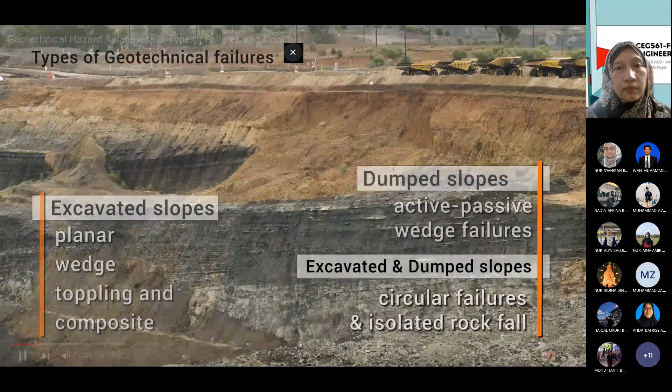The next section will discuss the main types of geotechnical failures that occur in open-cut coal mines. In excavated slopes, these include planar, wedge, toppling and composite failures. In dumped material, these include active-passive wedge failures. Failures that may occur in both excavated and dumped slopes include circular failures and isolated rock fall failures.

Planar failure: these types of failures occur where a block of rock slides along a single defect that dips and daylights in the excavated face. Wedge failure occurs where two continuous planar defects intersect and daylight in the excavated face.

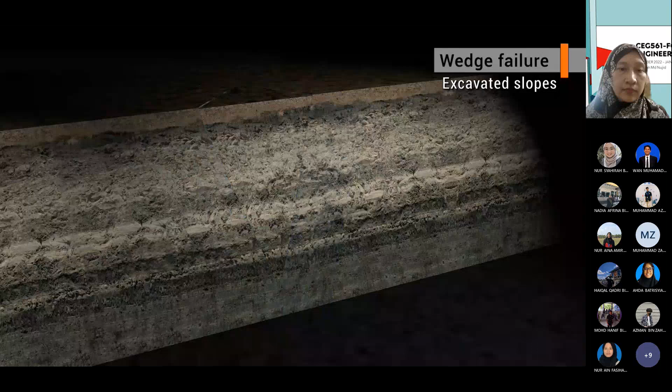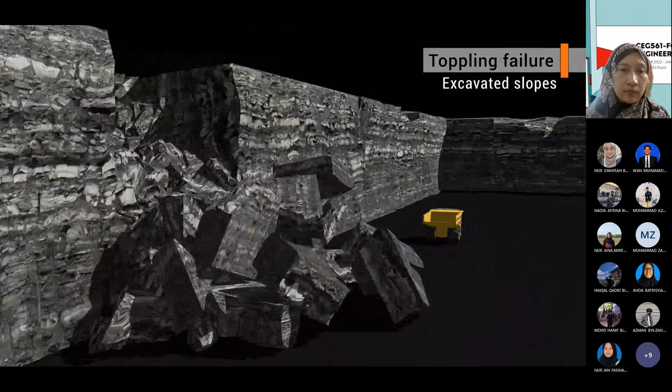Wedge failure occurs where two continuous planar defects intersect and daylight in the excavated face. Toppling failure occurs when persistent defects dip steeply into the excavated slope and the blocks or columns formed topple out of the face. These failures generally have a weak layer at the base that the vertical blocks slide along.

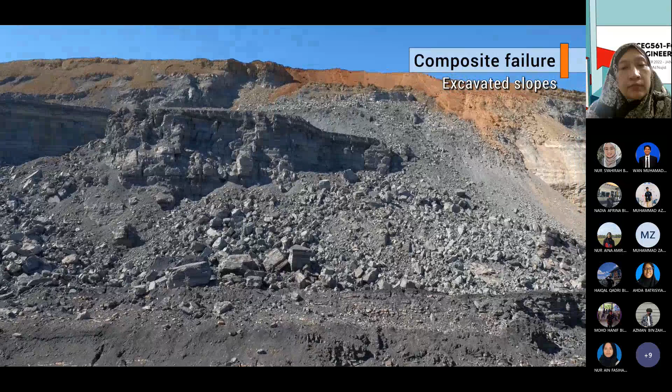Composite failures are typically the most common type of failure in excavated coal mine slopes. They involve a combination of planar, wedge and toppling failure modes along persistent defects, and also some component of rock mass fracturing and failure. Typical composite failures are vertically to subvertically bound by structural defects and horizontally bound by a weak, generally carbonaceous layer. Such failures occur at both the individual bench scale or as a failure of the overall pit slope.

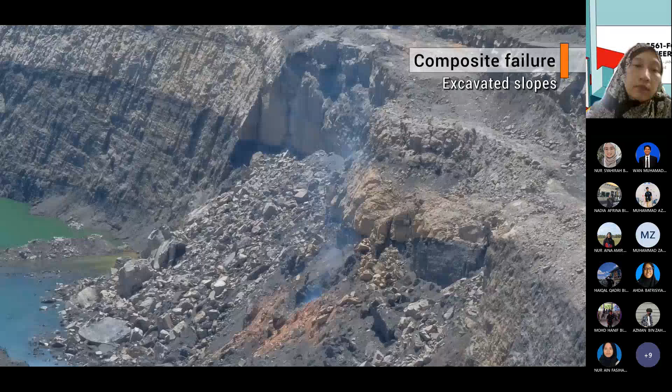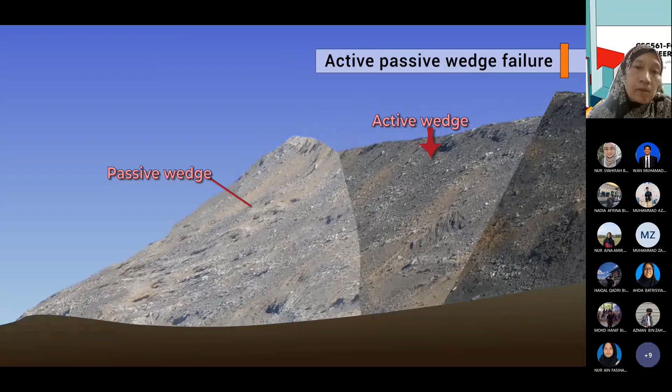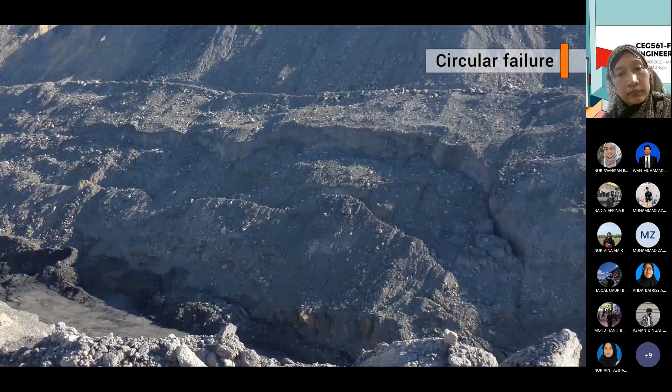Active-passive wedge failures occur in dumped slopes, particularly where the dump is formed on a weak and/or steeply dipping floor. Circular failures occur in highly weathered, soil-like or dumped material that contains little to no large rock fragments. Circular failures may be deep-seated or may occur near the surface where they are referred to as skin slippage failures. Circular failures typically result from an excavated or dumped slope that is greater than the angle of repose through undercutting or over-steepening mining practices.

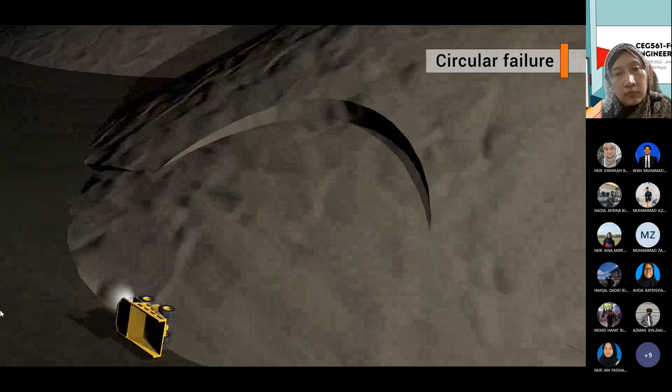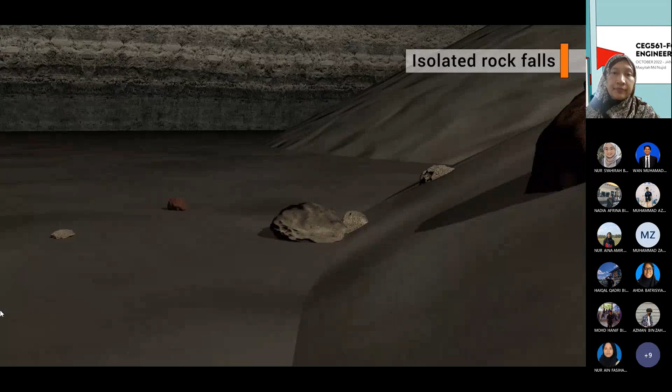Isolated rock falls are failures in which individual rocks fall out of a dumped or excavated slope face. These can be just as hazardous as failures involving a whole slope face. They generally occur after heavy rain events, where poor separation of dumped material has occurred, or where blasting has been poorly executed and the face not adequately scaled for loose rocks at the time of mining.

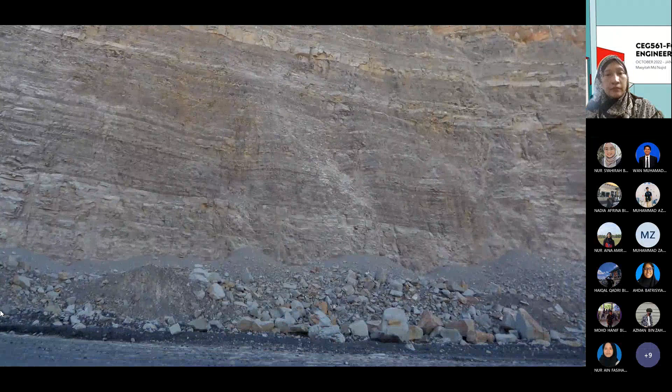Once a geotechnical hazard has been identified, an inspection will be completed as per site requirements. Controls will then be put in place to effectively manage the hazard, and must be followed at all times. If you observe conditions change from those documented in the site hazard report, notify your supervisor immediately.

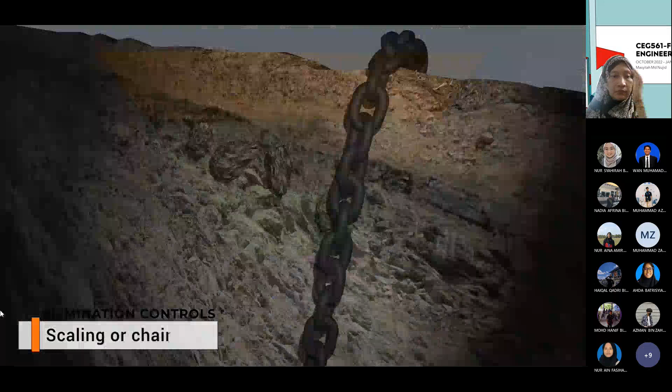Typical controls to manage geotechnical hazards using the hierarchy system include elimination controls: scaling or chaining of slope faces and crests to remove loose rocks, and trim blasting to remove unstable ground.

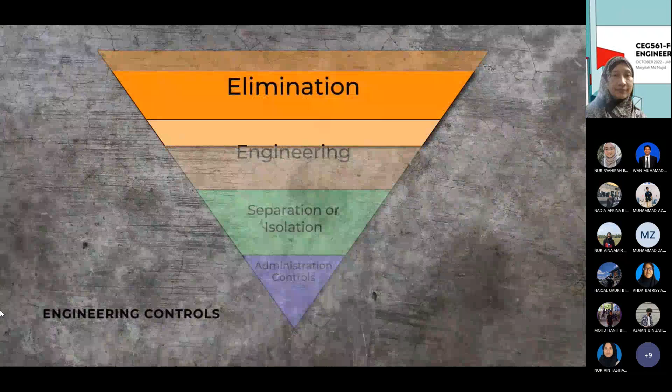Redesign or engineering controls: altering the blast design, such as changing from a hard wall to a soft wall, installing temporary buttresses, reviewing and redesigning the mine plan such as incorporating additional benches into both excavated and dumped slopes, and only allowing equipment with falling object protection installed to work within the hazard zone.

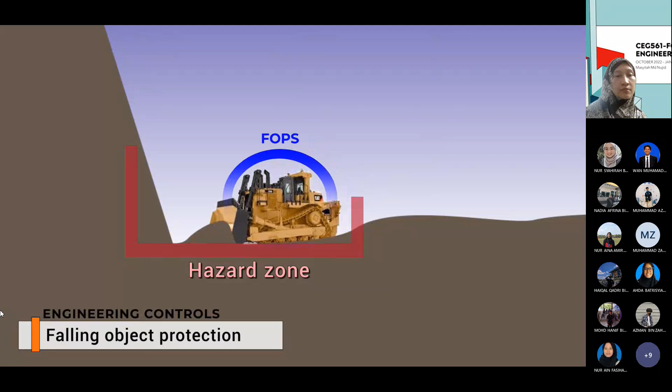Separation or isolation controls: controlling access at the crest or toe of the identified hazard by installing hard barriers, and restricting to single lane access past the hazard.

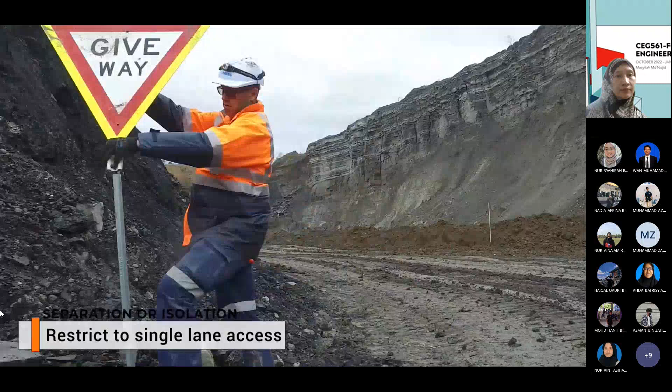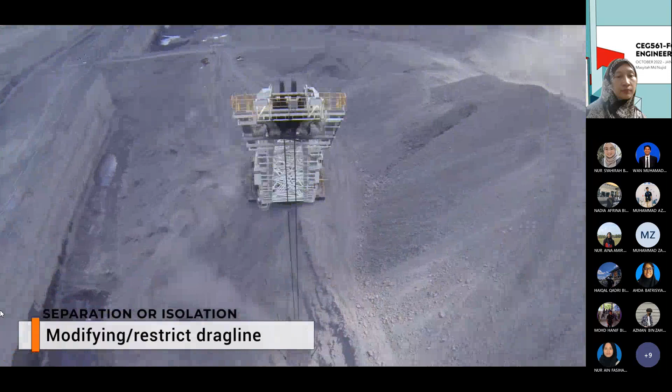Limiting equipment used in the hazard zone, such as allowing the excavator arm and bucket only inside the hazard zone, or modifying or restricting the dragline dig sequence to minimize exposure to the hazard. Regrading or re-establishing tip heads, and rectifying drainage conditions including installing pumps and grading slopes away from the crest into a sump.

Administration controls: increasing the frequency of inspections, allowing only experienced operators within the hazard zone, and completing additional risk assessments for specific mining sequences, such as mining on retreat or backfilling after mining coal. Establishing monitoring controls, such as peg telltales, wireline extensometers, prisms, LiDAR, or slope monitoring radars.

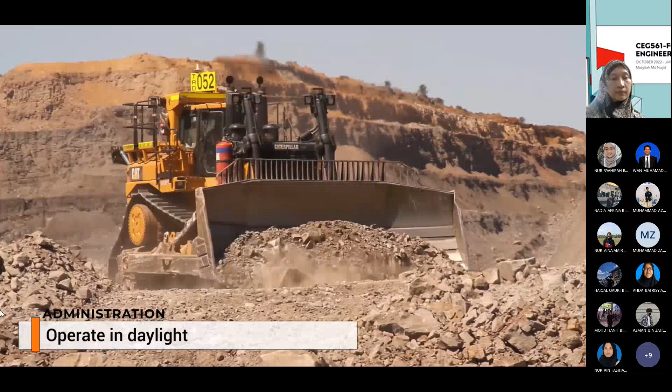Restricting operations to daylight hours only, or installing additional lighting. The number and nature of controls is governed by the consequence and likelihood of a slope failure occurring. Slope monitoring and implementation of standoff zones are two of the most commonly applied and effective controls if managed correctly.

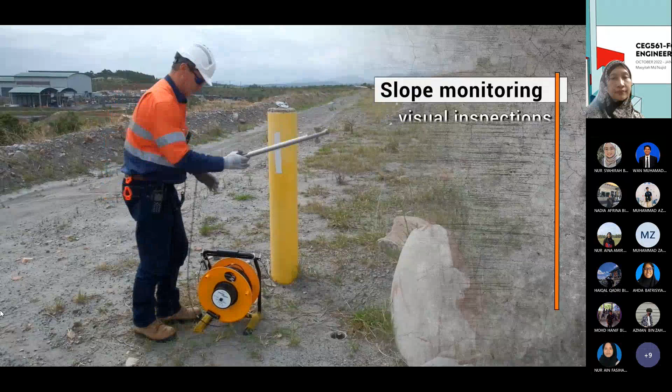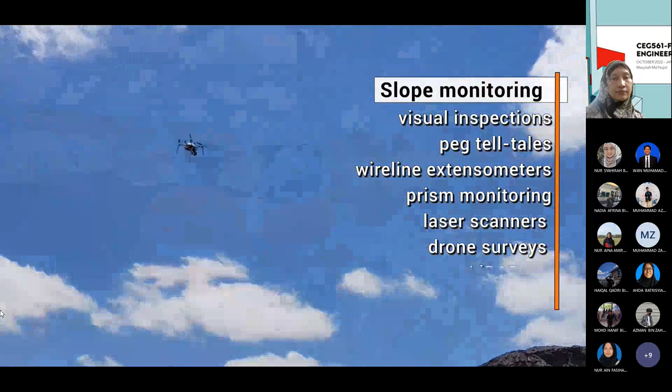Slope monitoring is completed by one or more of the following methods: visual inspections, peg telltales, wireline extensometers, prism monitoring, laser scanners, drone surveys, LiDAR, or slope monitoring radars. Monitoring devices can be used for either long-term, broad-scale detection of slope movement, or targeted monitoring of a specific area of concern. Regardless of the monitoring device implemented, it's important to remember the following.

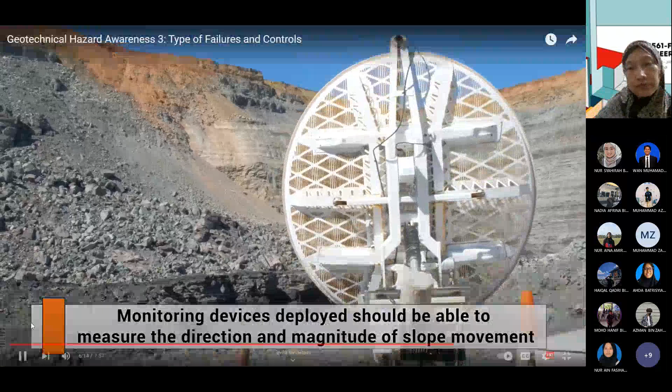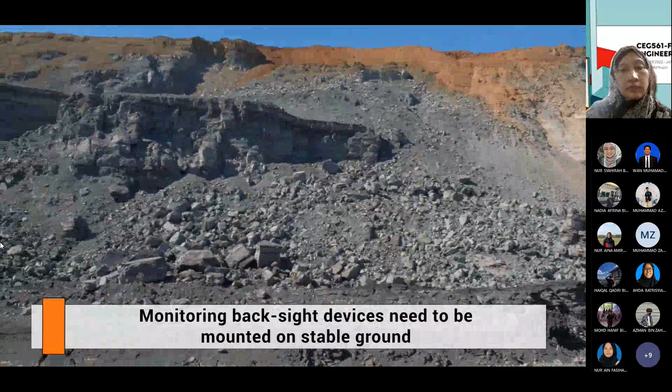Monitoring devices deployed should be able to measure the direction and magnitude of slope movement. Monitoring back-sight devices need to be mounted on stable ground, otherwise false or misleading measurements can be recorded. Monitoring equipment needs to be regularly inspected and serviced to ensure it is operating as required. Trigger or alarm levels need to be predefined and should be set at levels specific to site conditions.

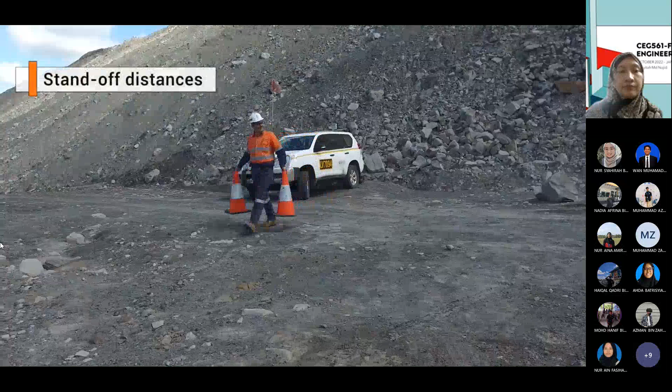Standoff distances can be applied at both the crests and toes of excavated or dumped slopes. Standoff zones are typically based on empirical charts, past performance of slopes with similar conditions, or modelling results from software simulating individual rockfalls or slope failures. The applied standoff distance should be appropriate for the type, size, likelihood and consequence of slope failure.

Many sites have standard restriction zones that are applicable at all times. Increases or decreases to these standard restriction zones are then made on a case-by-case basis depending on the specific hazards present.

I think you have seen and watched the geotechnical hazards. So what we can say is that the video shows us the causes of slope failure, and then how we can mitigate by controlling some techniques, adopting some monitoring, adapting by having advanced technology to control and monitor the slope failure.

It says that by integrating technology into our decision making, administrative work, and also the monitoring process, it can prevent future failure. So the purpose we can see from this learning outcome is to understand the causes and what theories are involved in the analysis and design, and how you mitigate to prevent future failure, and do some forensic engineering steps, solutions, and then propose guidelines from the public authorities, from any departments that deal with the project site failure.

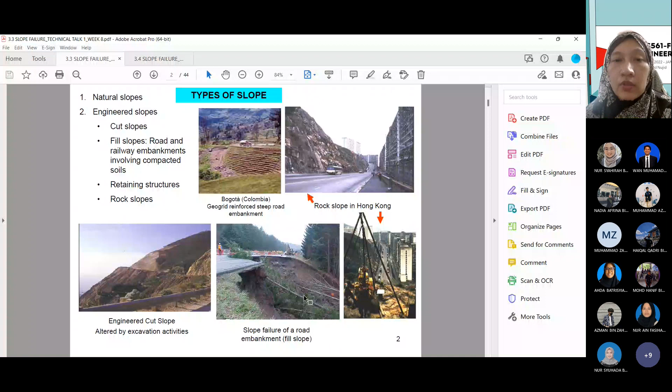So not to forget, natural slope failure can also occur. It's not only excavation activity that causes slope failure; it can also happen in natural slopes. So what are the reasons?

For example, if you take a case close to Malaysia, the Yan recreational area, and most likely happening in Baling. The natural slope failure is triggered by heavy rainfall. But when we did some forensic activities, we found evidence showing human activities on top of the hill, on top of the slope.

So we want to investigate the factors that bring about the landslide or incoming slope failure. If you do not have slope failure that brings water, it's just soil mass that may not be as harmful compared to slope failure coming with a landslide.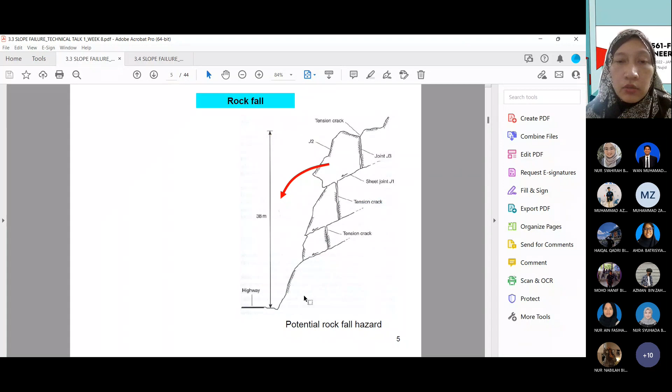And then on rock failure, for example in Bukit Lanjan, Malaysia, we also have rockfall. The rockfall can cause pavement damage. When this happened, for example in Bukit Lanjan in 2003, there were massive blocks.

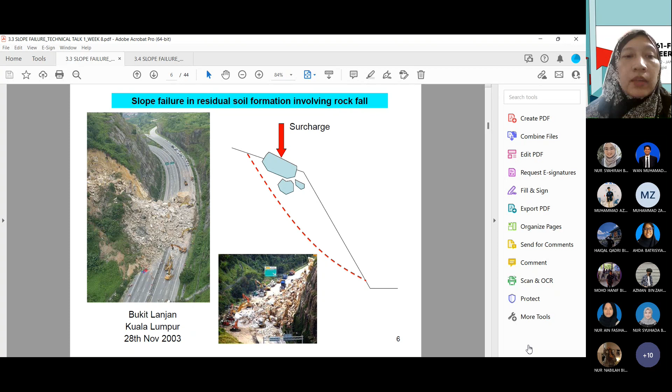By definition, I think everyone understands when talking about the features of slope failure, some terminology, and how the process begins, starting from weathering itself, from the intact parent rock becoming weathered from class 1 through the classic weathering grades, making the rock into soil form with lesser strength. When you go into detail, for example, you construct a structure on top of the slope or hill, it gives additional load.

So the additional load can bring the slope to a safe or unsafe condition. How do we justify whether the slope is safe or unsafe? We have to do some sort of analysis.

On slope materials, we have so many deposits such as alluvial, glacial, aeolian, residual. All these deposits are defined by weathering processes - for example, residual deposits are formed in place by mechanical and chemical weathering of their parental bedrocks.

In forensic investigation, it's not only looking at the geotechnical aspect - your site is near the geology origin, the geology background. So you need to find out what is the parental rock in the site area. Once you've identified this parental rock, you can support your final decision on whether the structure is stable to be built on that kind of parental rock.

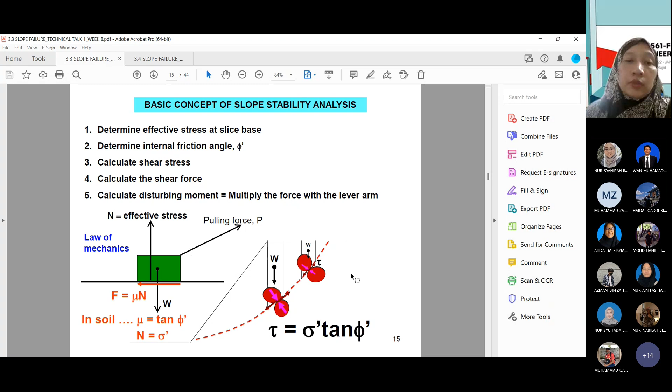Remember, by adopting any method of slices, we are dividing our soil mass into few vertical slices, and then starting to calculate and determine the factor of safety, identifying what are the disturbing forces or stresses, and what are the resisting forces and resisting stress. So when you have FOS greater than 1, we can say the slope is stable. The same thing is adopted in slope stability using the effective stress concept.

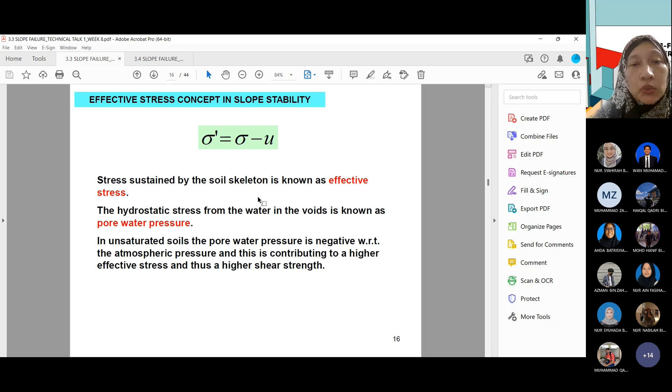Effective stress concept means you have effective stress equal to total stress minus the pore water pressure, U here indicating pore water pressure. However, most likely the slope failure may occur due to unsaturated conditions. What is the unsaturated condition? It's a condition where the slope mass may fail in regions where the upper part is unsaturated in dry conditions, and the below part is in saturated conditions. So using the simple effective stress analysis or concept might not be enough to get the correct answer if you are analyzing manually.

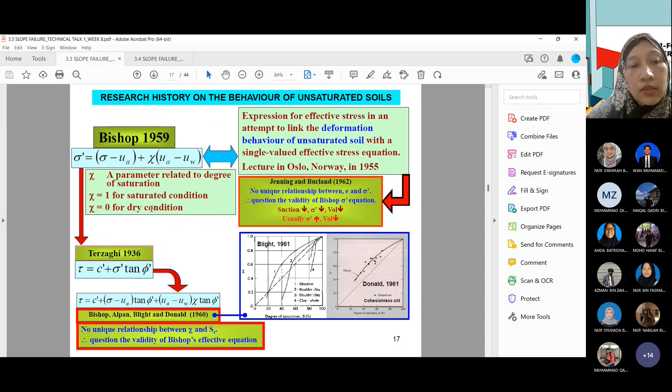The old theory, the old concept, might not be relevant or give the right solution nowadays. So other theoretical researchers such as Bishop and then Fredlund introduced the concept of unsaturated soil. Why is this concept or theory of unsaturated soils important? Because they found out that slope failure is not due to effective stresses subjected to water pressure only - it can also happen due to air pore pressure. That's why the Mohr-Coulomb formula or theory has been extended by including the suction effect for unsaturated soil.

Right now, just now we only have effective C plus sigma effective tangent effective phi. Now the formula is extended by including the effect of air pore pressure minus the pore water pressure, so the failure surface will be changed. If you remember from advanced geotechnical engineering, we have seen the critical stress path and the failure envelope represented in Q-P space. When you plot the Mohr-Coulomb failure envelope compared to the advanced theoretical formula, that will be totally different in terms of the failure envelope. The failure envelope for the advanced theory can show uncertainty that could not be predicted using the Mohr-Coulomb theory.

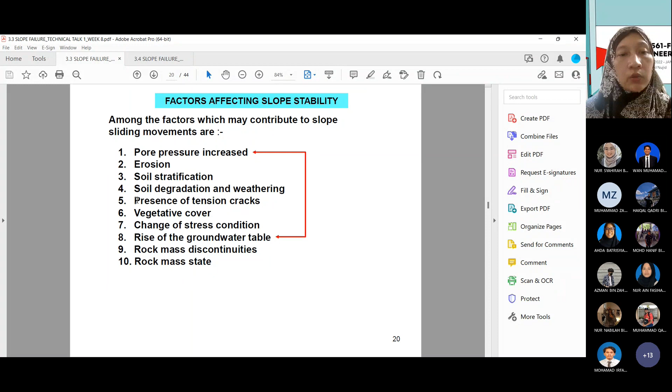You just take it generally. How do you know or how do you identify the causes of the failure itself?

What are the important items that need to be carried out when you try to evaluate the stability of the slope? The first important item, as I said, is the shear strength of soil.

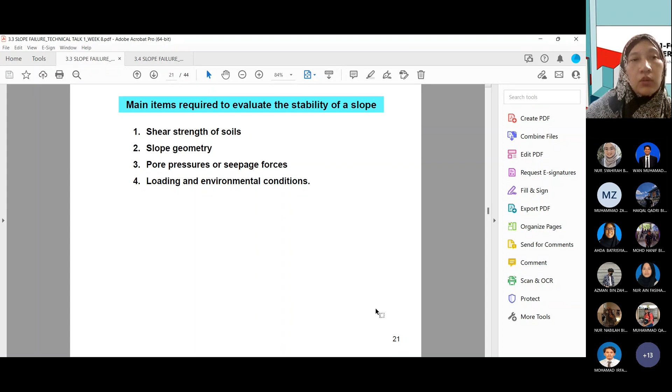Back to the suction, one of the causes is the pore pressure effect. As I said, pore pressure doesn't come only from water, it can also come from air. The unsaturated theoretical concept adopts the suction theory. Suction is the difference between the air pressure and the water pressure. In the field, air pressure is 0 atmospheric, which is 0 kPa, and the pore water pressure is negative. Cavitation occurs at negative 101.3 kPa, or 1 atmosphere.

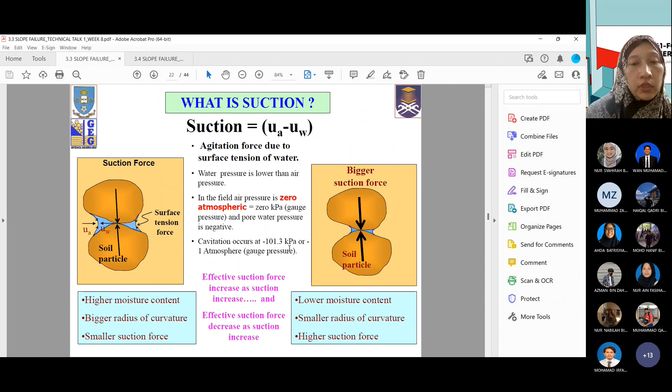If you look at this concept, it says that slope failure may introduce two different zones: the first is unsaturated, and at the bottom is the saturated zone. So we can no longer simply use the Mohr-Coulomb theory. This particular problem, especially in slope stability applications, the theory behind the failure must be adopted using advanced techniques such as unsaturated conditions. The unsaturated condition increases the shear strength and produces a higher factor of safety (FOS). This is the benefit of including the suction effect in your theoretical concept.

I will not explain this in detail because we are not covering unsaturated soil, but it's good to have an overview. Just remember the conditions of the unsaturated zone, and the effect of pore water pressure and pore air pressure on the soil mass above the slip circle, and the conditions splitting between the unsaturated zone and the saturated zone.

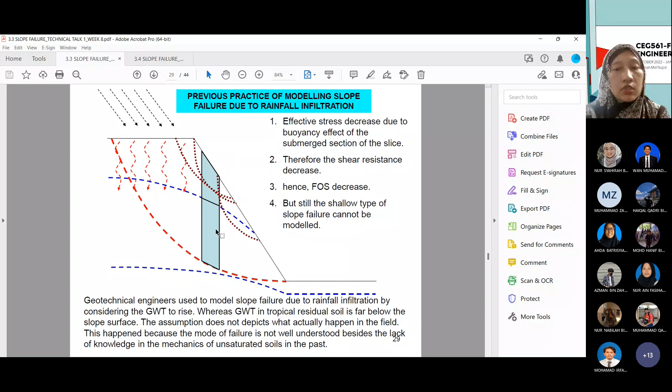The factor of safety concept can be analyzed. Just now we focused on the concept and design, adopting the proper theoretical formula. The analysis can also be calculated using limit equilibrium analysis, and also using the finite element method for factor of safety. The FOS is derived from the summation of forces in two directions and moments about a common point. The stability calculation is performed by dividing the soil mass above the slip surface into vertical slices, if adopting limit equilibrium analysis such as the method of slices, Bishop, and Fellenius.

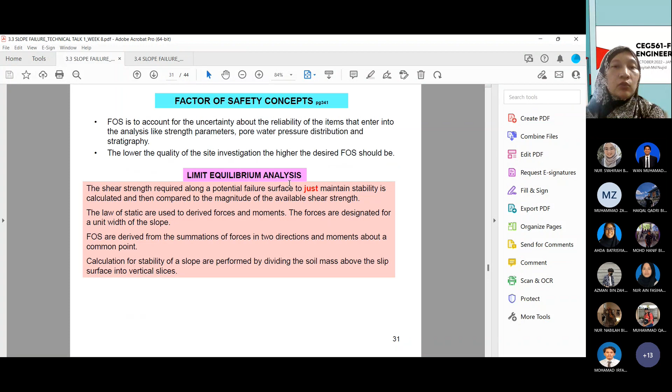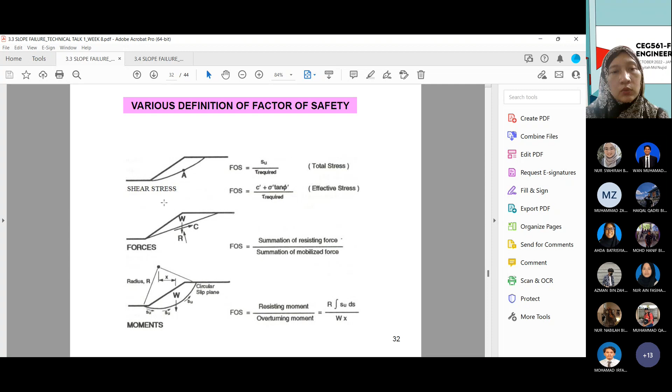Okay, that's what we want to explain. If you remember what you had done in the past using the manual calculation to calculate FOS, that's what we call the limit equilibrium method. Understanding the ratio between the SU and also the shear stress required tells you the value of FOS.

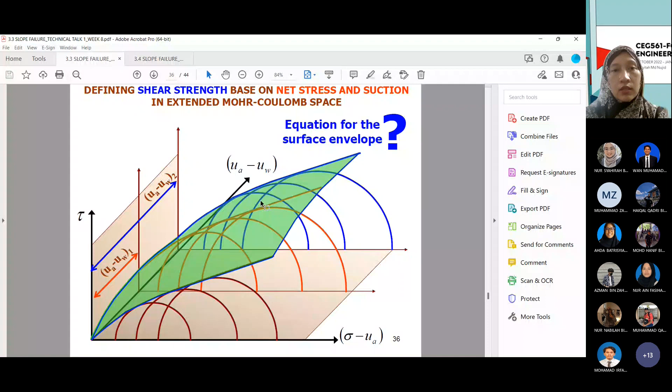Okay, the shear strength model. This is, as I said, the advanced shear strength formula and theory to calculate the FOS in slope stability. So look at the failure surface. The failure surface is not anymore a straight line, but as assumed by the Mohr-Coulomb model. Right now you might see the circular envelope curve representing the conditions for suction.

Remember, I'm not sure if you're taking advanced geotechnical engineering, but one of the soil models is Mohr-Coulomb. The simplest model for understanding the behavior of the material, either structure or soil, is using the Mohr-Coulomb formula. The good thing about Mohr-Coulomb is it only needs about 5 parameters, the strength parameters and also the stiffness parameters, in total 5.

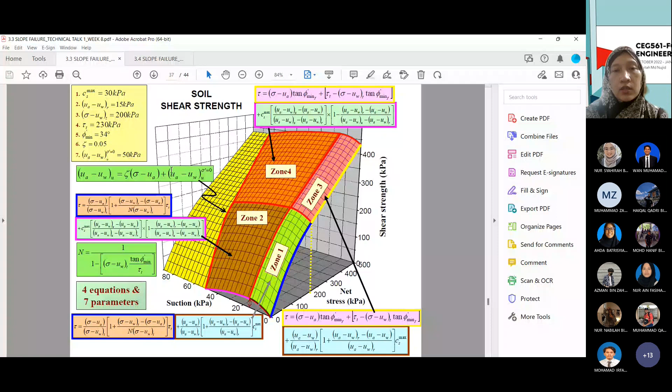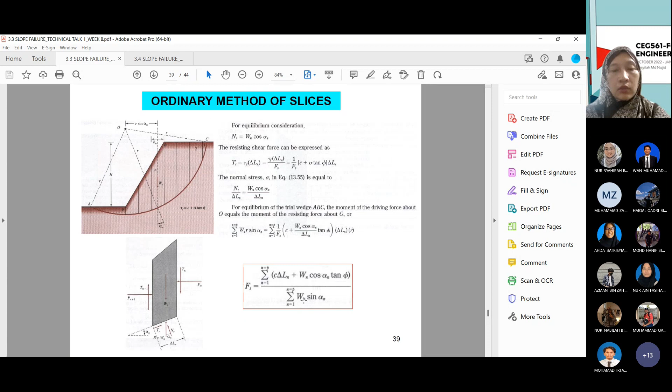So we need to determine one by one all those values from this failure envelope, the circle of the failure envelope of the soil. Okay, this is another concept to calculate the FOS using the limit equilibrium method. I hope everyone remembers we divide the soil mass into a few vertical slices, and then we define and determine the disturbing moment and also the resisting moment to get the FOS.

Okay, generally what we understand is the FOS decreases when the water table rises. That's the thing we usually see. Even now, we can see that the public authority has already installed one monitoring system.

Monitoring gauge to predict the failure of the soil, integrating with the internet, or we call it IoT. This monitoring gauge will tell the authorities about the soil movement. Is the soil movement in the range of stable, or the soil movement in the range of unstable? So it's a mitigation and controlling technique to predict before having a massive failure.

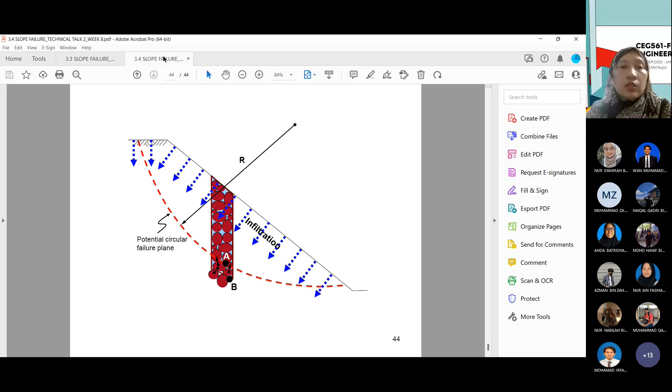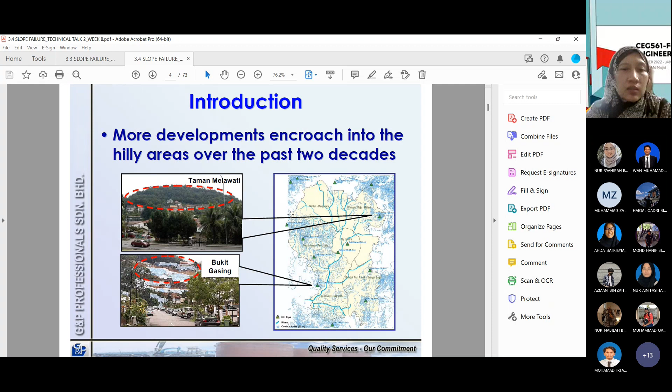Okay, the next one, we go to other notes slides given by a practitioner engineer. It starts with the landslide causes. I think it's the same thing we had seen just now. One of the cases here, very common and very famous, was Bukit Antarabangsa. I think some of you had already taken this case and investigated the structural aspect of failure.

But now you have to see it from the geotechnical aspect of failure. I mean, is there any pore water pressure existing at the failure zone? And then what were the slope failure causes and the slope failure mode? These are the pieces of information that can be highlighted in your report.

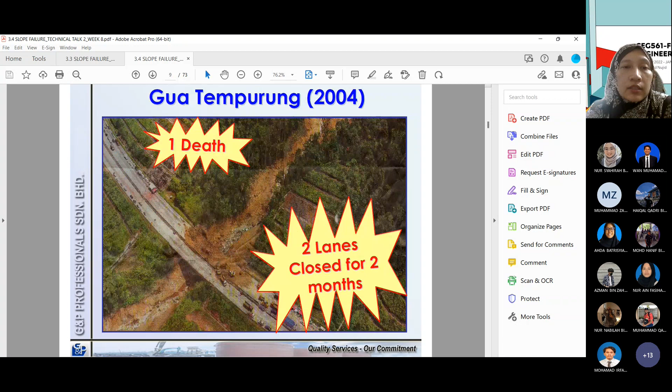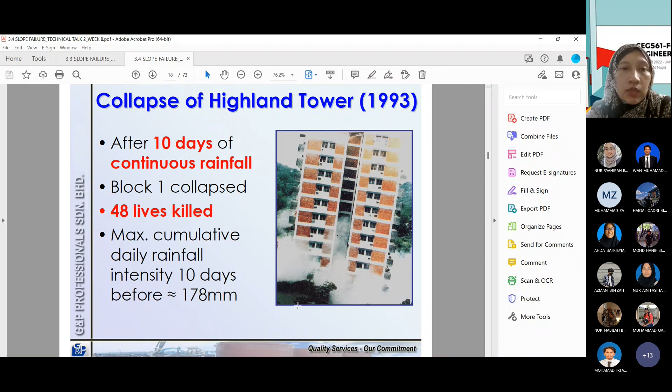Okay, similarly for Bukit Lanjan, Ulu Kelang. Again, this one is very general information on the case description, and how the slope failure or landslide may occur. So the same concept, having friction and then the sliding effect, telling you the resisting and disturbing forces.

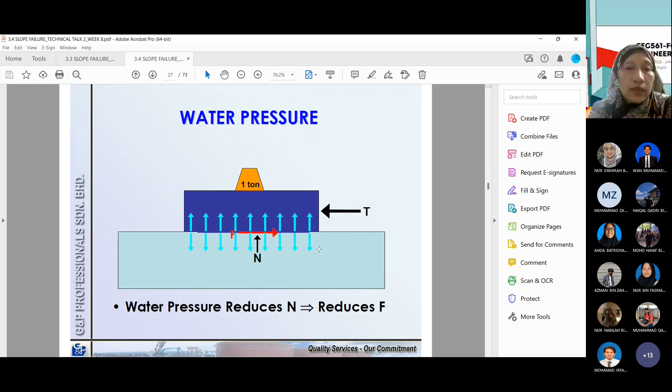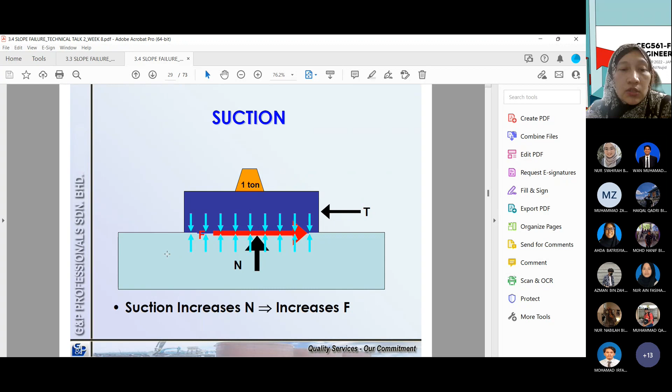One force tries to disturb, the other force in a different direction tries to resist it from failing. Then there's the effect of water pressure. How does water pressure reduce the value of FOS, and the suction effect? You can see the suction effect here by replicating the friction concept, and similarly showing how the suction increases in N forces will increase the value of force F.

And why does the landslide occur? From this table, given in 2006 by two practitioner engineers, it's stated that out of the 49 cases, 29 or 60% were

contributed due to design errors. So what are the common design errors that can happen here for landslides?

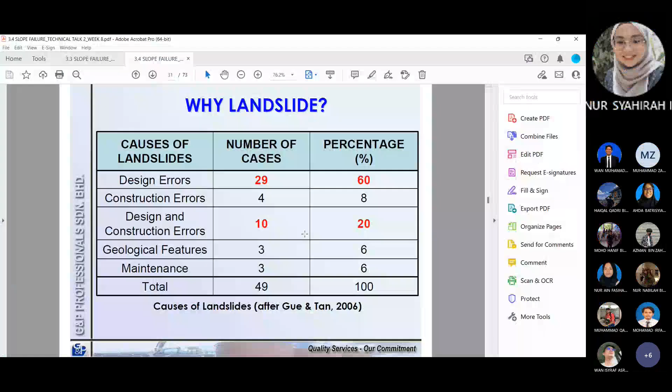Okay, back to our slide just now. This slide is very important because we can see from the different perspective of the practitioner engineers. For the first slide just now, you saw from the perspective of the academician. That's why you can see the detailed formulations in terms of the strengths and also how the unsaturated concept is adopted in the slope stability analysis. You can see that there are very tedious processes to identify the equations and then the parameters to produce the right failure envelope.

So from the academician point of view, now we look at it from the engineer's perspective. Similarly, when you go through row by row, design and construction errors only contributed 20%. The rest are from maintenance, geological features, and construction errors. Construction errors can be due to the site supervisor not monitoring work properly, and geological features, for example, the presence of a weakness plane not being counted in your analysis, and the discontinuity of the rocks. So these are the errors that are triggering landslides.

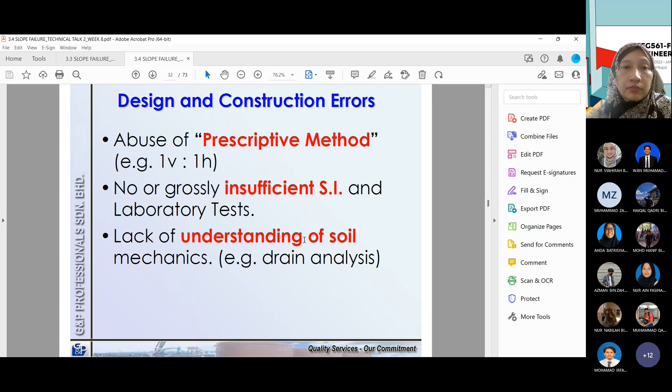Another factor is the slope geometry design. If you look here, let's say you are trying to have a cut slope, and you propose a slope geometry of 1-to-1, one vertical to one horizontal, then you get the angle. So the angle here, for example, is 60.75 degrees with a height of 16 meters. Do you think the slope is stable with an angle of 60.75?

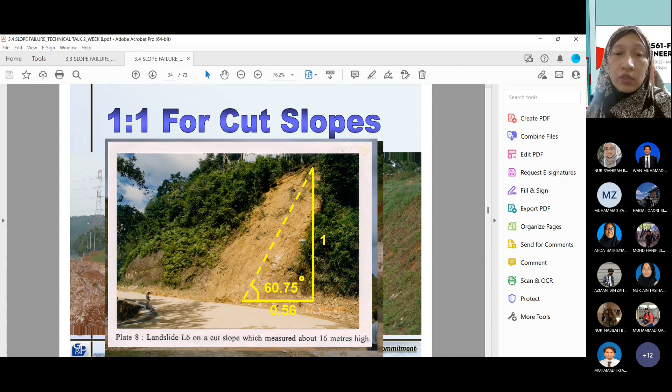Vertical is 1, or 16 meters high. If you were the engineer on site, do you think that this slope geometry design is safe, or is it something that can affect the slope stability?

Another thing is when you have certain soil properties, if you compare slope 1 and slope 2 with different geometries - for example, the height of the slope is 6, similar to slope number 2, but the horizontal distance from the crest of the slope to the toe of the slope is 13.2, whereas for slope 1 it is only 7.5. I mean the horizontal distance from the crest to the toe of the slope is 7.5.

We can see how soil properties and slope geometry design affect your factor of safety value. This indicates that slope number 2 is unstable due to the soil properties itself and also due to the slope geometry. The selection of the slope geometry is not right. So the slope geometry can be changed to 1 vertical to 2.2 horizontal - this is the best slope dimension for the number 2 case slope.

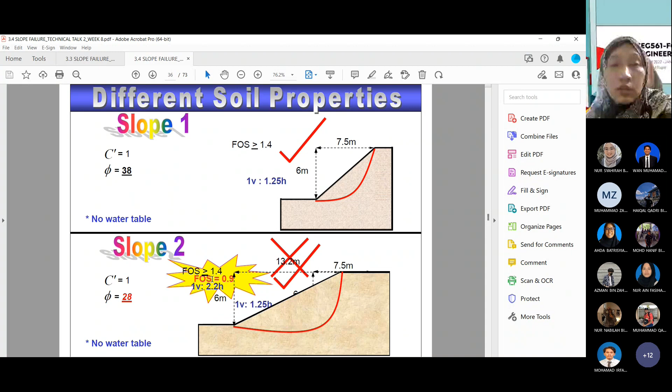For slope number 1 and slope number 2, the effect of the water table is neglected - so we did not include the effect of water. How about if you are dealing with a slope that has the effect of a water table? Of course, you are adding more additional pressure to the soil mass.

Not to forget, when we are correcting slope failure or proposing a slope analysis, there are some guidelines or reference factor of safety values that can be used as indications. For example, if you adopt a manual from an office such as the Government of Hong Kong, it shows how a slope can be categorized into negligible risk, low risk, and high risk, according to the factor of safety value, and also according to the effect of economic loss and loss of life for a 10-year return period rainfall. So when you analyze it, you are also considering the effect of rainfall for the next few years ahead.

This is very crucial because we are dealing with unsaturated conditions, and we play around with hydraulic concepts - the Darcy law, the intensity of water - and how you make predictions on the hydrology in terms of rainfall for a particular period of years.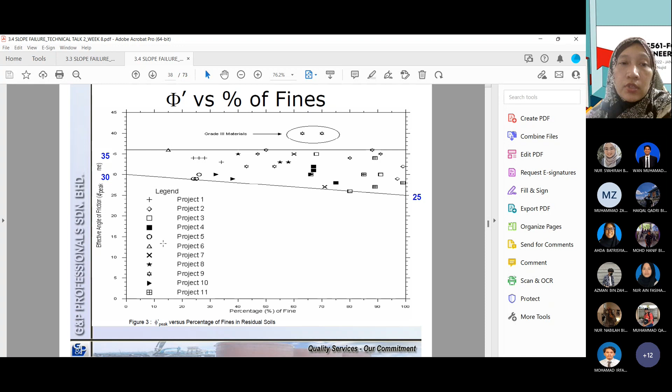If you look at the soil strength used for calculating stress or the FOS, you can see how the effective friction angle relates to the fineness of the materials, and how this friction angle gives the value of FOS. The left and right slopes each have similar effective friction angle and effective cohesion - 1 kPa and 33 degrees. Slope left and slope right have similar values.

You'll notice these two slopes differ in factor of safety - for what reason? Can you see what causes the FOS value on the left and right to differ?

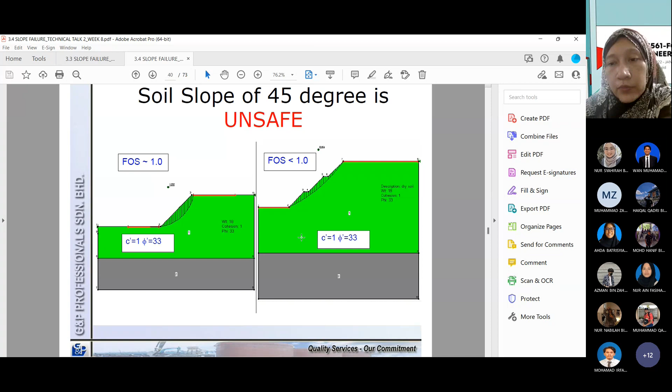And also on the right slope, having the same soil properties, dry condition, weight of soil is 18, cohesion 1, phi 33. But now you can see that there are many berms involved, for example slope face 1, 2 and 3. So there are 3 slope faces, meaning there are 3 berms. So we can conclude that as we have so many berms, it will decrease the factor of safety value. So it's not good to have so many berms, it will produce low FOS.

Okay, the other thing we want to see is the effect of the slope itself. If you look here, the slope geometry is 45 degrees. But now, on the same slope design, we have different berm dimensions and different geometry of the berm itself. So we can conclude that having so many berms will reduce your FOS value.

So you can analyze FOS for slope stability using the limit equilibrium method in SLOPE/W, or you can analyze slope stability the fast way using the finite element method in Plaxis.

So I am offering you this, because you are trying to produce a report, right? A report that you chose, for example, I looked at the list of projects, some are at the college, some maybe at a flat ground area which doesn't have any prone of slope failure. But when you are doing investigations for building failure etc., you can also include other important information, such as the foundation of the structure, what type of soil stratigraphy, soil profile it was built on.

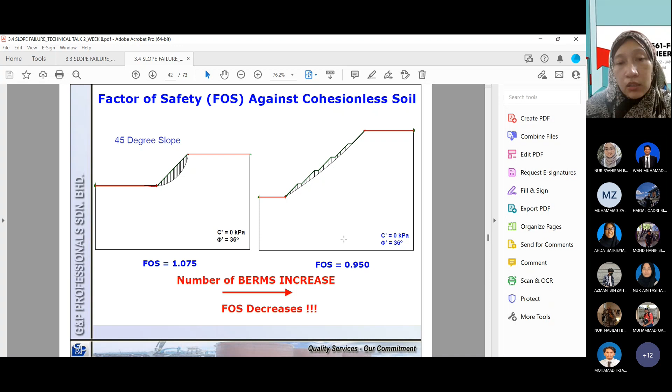Now we have seen the effect of berm, groundwater level, and additional load, with the presence of groundwater decreasing the factor of safety value. Also, looking at the retaining wall dimensions, by having some sort of ratio, you can determine what is the best retaining wall design, whether at 8 meters, 6 meters, 4 meters, or 2 meters with this kind of dimension.

The retaining wall can be changed in terms of size and dimension because you want to check the stability of the retaining wall given this kind of soil condition. We try to retain the slope face from failure by having a retaining wall, and then you have to decide on the retaining wall design and dimension - how wide, how tall, how tall the retained soil is, and whether it is safe or unsafe for the soil structure.

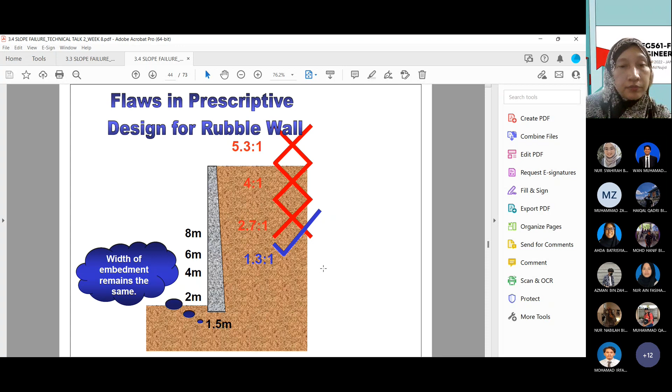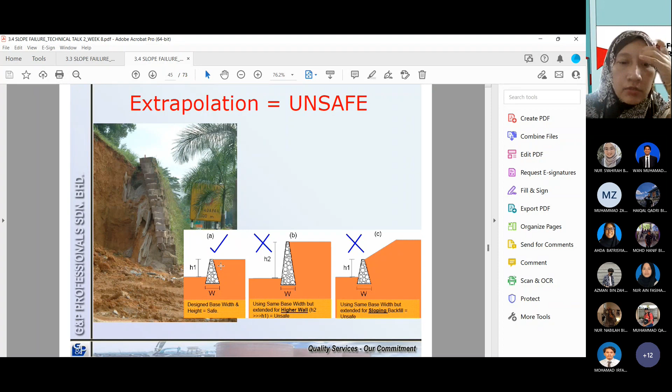This is the conditions for the rubble wall design, telling you the best design dimension from options A, B, and C. I think you can work through this on your own.

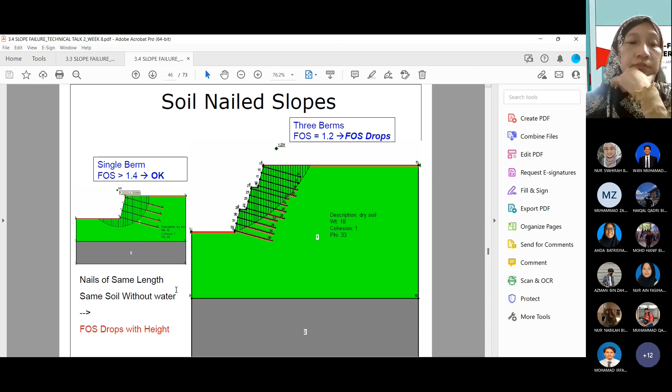The other thing, when doing the mitigation, slope management, and monitoring, these are the things that need to be involved: policies and legislation, slope maintenance, construction quality control and site supervision, and other additional information such as inclusion in the module syllabus, structured training for practitioners, and having extensive research and development.

If you Google, for example, I have written a research article regarding slope failure, analyzed using Plaxis 2-dimension, investigating the slope deformation and stability. I adopted the Plaxis software, which is capable of predicting the strength at failure, and it can give you information on what the factor of safety was during the slope failure. That's good about using numerical software in analysis.

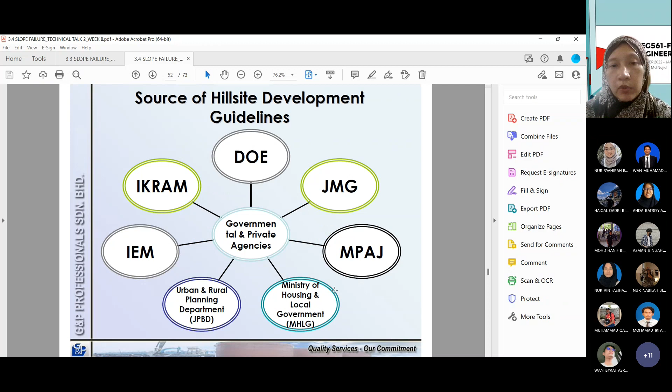Okay, legislation policy ni selalunya kita akan involve with the public authority guideline lah. And if you look at here, DOE for example has tabulated a table which having different classes of failures and also its limitations and the recommendations of the slope terrain, dia punya dimension berapa and the slope angle berapa, is it suitable for this kind of soil properties, so you can follow the guidelines. So the guidelines can be referred at the initial stage of the design and analysis.

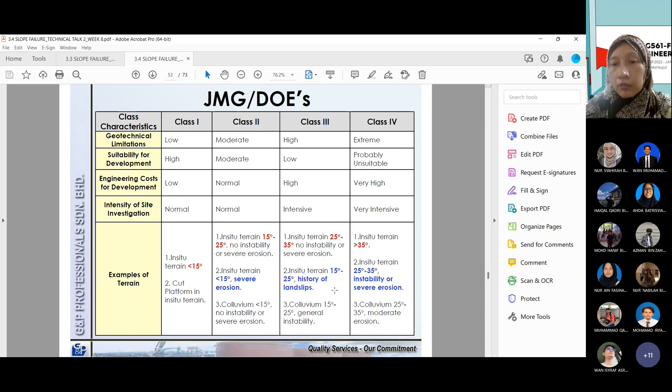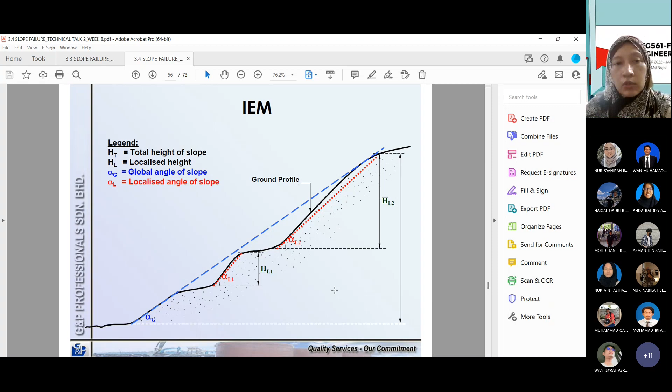Similarly, at the monitoring or any kind of mitigation techniques, IKRAM pun dia has their own table, IEM as well, and also IEM produce some slope geometry to give some idea what we call as the total height of the slope, localized height, the global angle, and the localized angle of the slope.

Not to forget lah, bila you buat sesuatu kecil kan, sebab forensik ni lebih cerita kepada benda yang dah berlaku kan, tapi kita pun boleh buat langkah awal pada ketika di mana you nak buat satu projek baru. Projek baru ni pula berhampiran dengan projek site yang dah pernah ada failure record. Dalam order untuk prevent any future development construction facing the same problem that has been reported or recorded, so we can adopt the same information from the neighboring area. Maknanya bila kita nak design untuk site yang baru tu, kita boleh rujuk pada site yang dah mengalami kegagalan tu sebagai kita punya garis panduan untuk designing, analysing dan juga untuk verification purpose.

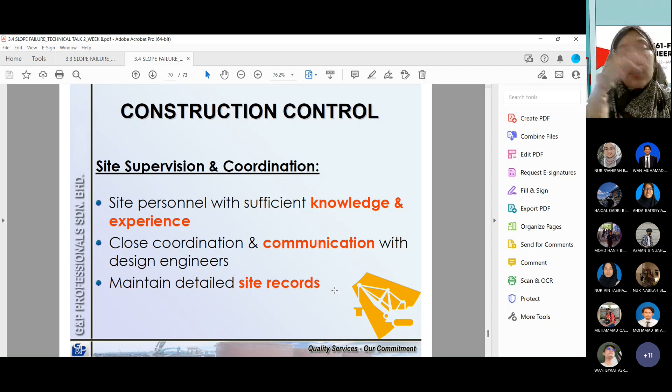Okay, construction control ni, kalau kita tengok from the beginning of our lecture just now, the most important role is the site supervision and also the coordination. Make sure that our site engineer is sufficient with the knowledge and experience, having a closely toolbox meeting, and then close coordination, communication with the design engineers, and then maintain the detailed site record. Somehow site engineer kata macam ni, design engineer kata macam tu kan. So bila design engineer turun dekat site, lain jadinya. Site engineer tengok plan layout, lain. So dalam kes ni siapa nak jadi orang tengah untuk meleraikan isu antara site engineer dan juga design engineer. Itu belum lagi kontraktor campur tangan kan ataupun klien.

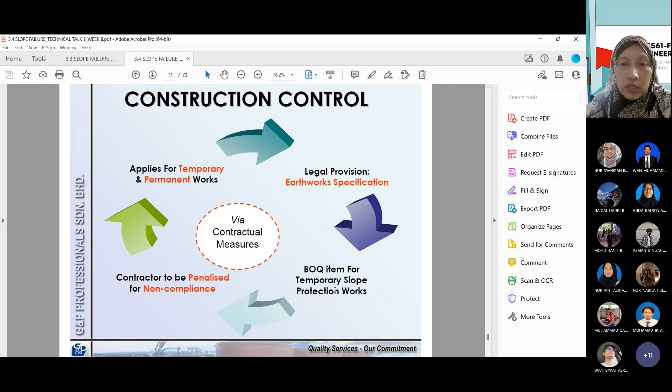Okay, dalam construction control, ini dia punya cycle dia lah. Start off dengan applies for temporary and permanent works, apply for legal provision, earthwork specification, and then the BOQ item for temporary slope protection works, and contractor to be penalized if not compliance to the guidelines. So this is the process can be adopted in the construction control.